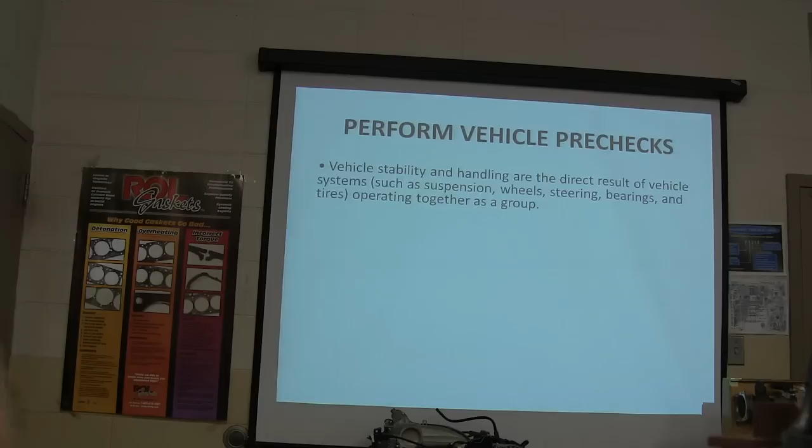Alignment procedures. The first thing you're supposed to do when getting ready to do an alignment is perform vehicle pre-checks, checking vehicle stability and handling for the result of vehicle systems such as suspension, wheels, steering, bearings, and tires. If you've got anything wrong with any of that stuff, you're wasting your time doing an alignment.

The other day we had one in here, the 08 Impala that came in pulling. Remember that? Who was working on that alignment? You and who else? Y'all worked on a four-wheel alignment. You got it all lined up just like it was supposed to, but it was still pulling in the same direction it was when it came in, even after all that trouble. What did we do then? We swapped the tires. The tires looked good, didn't they? But we swapped them and it pulled the other way, so we knew we had a tire pull. That's how you determine if you've got a tire pull. Then what did we do so we could give it back not pulling at all? Put him to the back. Was that Columbia's car? That was the dark blue one Crudup drives - the Impala that President Rydell used to drive.

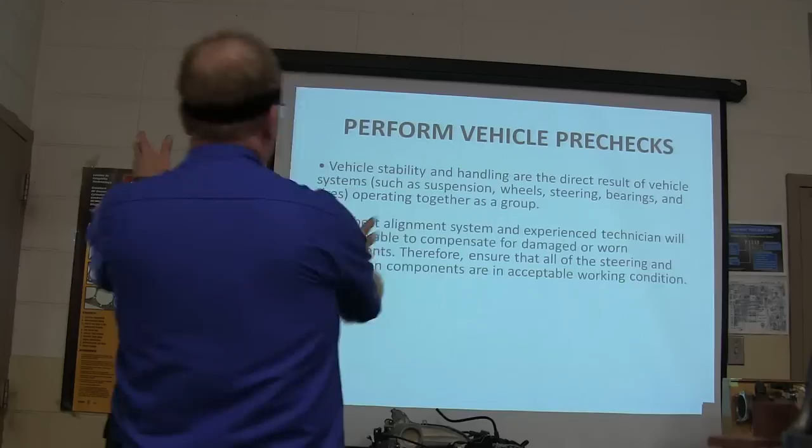So the best alignment system and experienced technician will never be able to compensate for damaged or worn components. You've got to ensure that all the steering and suspension components are in acceptable working condition.

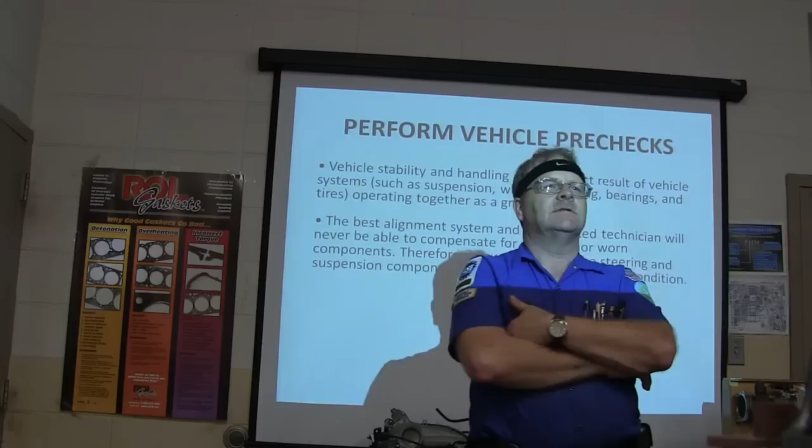How many of you, if I say the words dry park check, know what that is? Anybody? You have somebody get down with a flashlight and lay under that car where you can see the suspension and steering components, and have somebody turn the wheel a little bit back and forth - not all the way, just a little - and you look for what's loose under there. That's called a dry park check in some textbooks. I'll be honest, until I read some textbooks I never heard that term, but I've done that a lot - lay down under there and see what was loose, check the tie rods and everything, make sure that stuff is good.

It's really important, particularly if you're inspecting a 15-passenger van or something like that, to take your job seriously and get under there and look at those front end parts, and not just check it off. Because if there's 15 passengers and they go off in the canyon because a tie rod end came apart that you didn't catch, you may have had good cornbread and enjoyed your movie before bed, but they went off in the canyon because you were remiss in your duties. Be really, really careful. Take this very seriously.

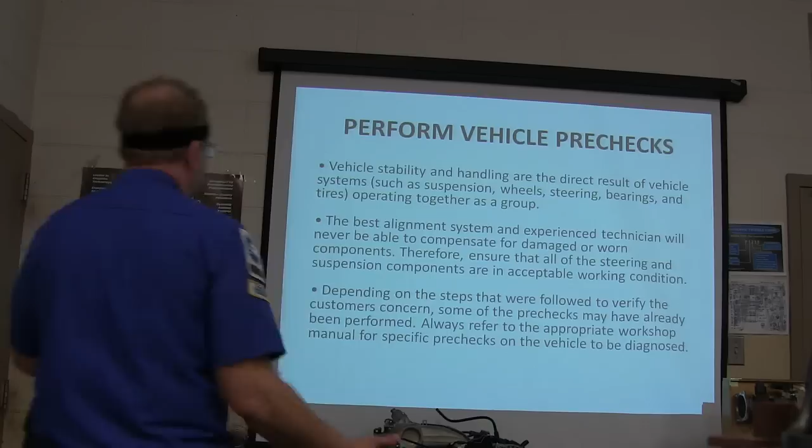Depending on the steps followed to verify the customer's concerns, some of the pre-checks may already have been performed, so always refer to the appropriate workshop manual for specific pre-checks on the vehicle in question.

Now we've got tires we're going to look at - these are on-the-ground pre-checks. We've got rapid shoulder wear. What causes that? That's underinflation, or riding on one side of the tire more than the other because of toe or camber. If you're wearing heavy on both sides, that's typically going to be under inflation, because the center of the tire dips in and the outer part wears more.

What about this one here, rapid center wear? That's overinflation. It's not a great illustration, but if you've got center wear worn out here, what happens is the tire bellies out when you put too much air in it, causing the center tread to wear out more. Now it doesn't dish like this - it's just a bad drawing. I could have fixed that in paint but didn't think about it. Cracked treads - that's old tires. Yeah, that's basically just something you look at.

How can you tell if a tire is too old? How old is too old for a tire? Because it's got a date of manufacture on it. So how old is too old though? 5 years. Well, it's actually 6 according to some of the people I've talked to.

Basically, if you look at a tire, say a lot of times we'll go get used tires, and we just look at the tread, or it looks pretty good, so we pop it on there. So what happens is if you don't look at the date on the tire - most of the time, about 90% of the time, you can look at the date and tell, because it's going to have 4004 or something like that. That's the 40th week of 2004, when it was made.

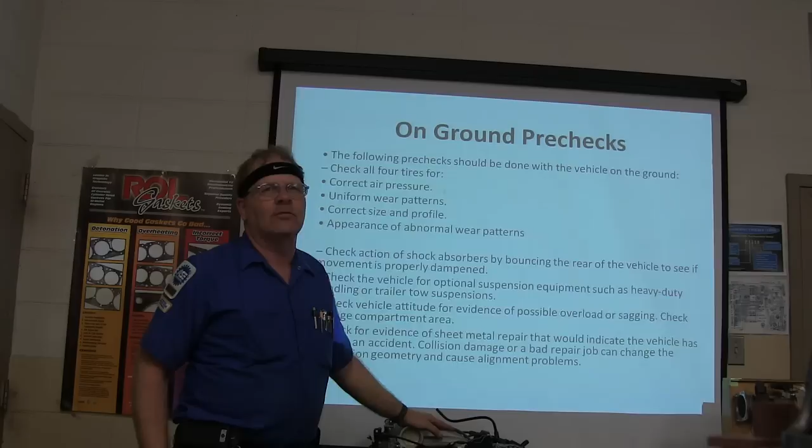Basically, if you see any of these conditions, you need to make sure you recognize them. So you're going to do this - another little check on the ground. Following pre-checks on the ground: all 4 tires for wear. If somebody's doing an alignment and they don't check the air pressure before they do the alignment, they are not doing it right. You better check that air pressure before you do anything else. Really important - the uniform wear patterns, which is what we just covered. Correct size and profile, appearance of abnormal wear pattern.

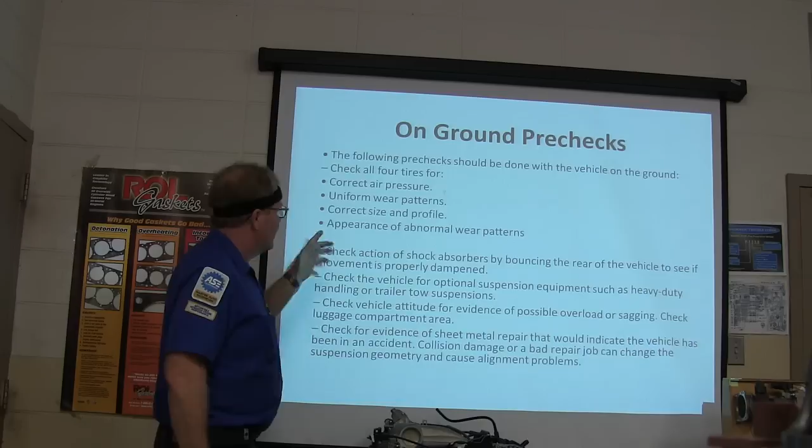You got to check the action of shock absorbers. Bounce the rear of the vehicle to see if movement's properly dampened. Have you ever seen one when somebody stops or something goes boing, boing, boing? We had an 05 Cadillac CTS pull in here one day - hit the brake and just bounce and bounce and bounce. Those shocks were about $100 a pop. The front one was shot. Didn't have any miles on it either.

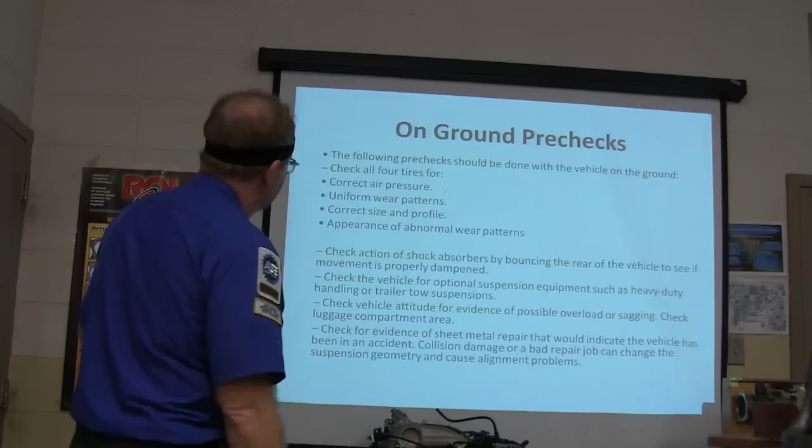Check the vehicle for optional suspension equipment, such as heavy duty handling or trailer tow suspensions. If somebody has beefed up the suspension, it's going to change the way it rides. Or the air ride - yep, that too.

Check vehicle attitude for evidence of possible overload or sagging. In other words, if you haven't looked in the trunk and they've got a bunch of copper wire back there or something weighing it down, you're going to get a skewed alignment. You may line it up while that hogwash is in the trunk, but what you're going to see is the alignment angle is going to change when you take stuff out of the trunk. Things change whenever that weight shifts.

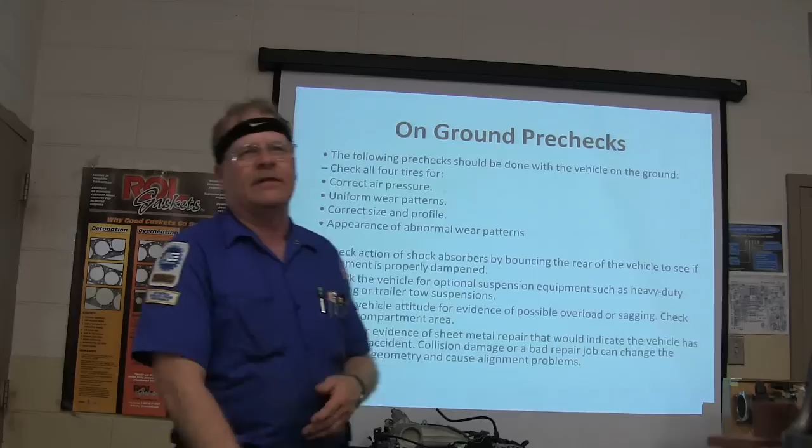Check for evidence of sheet metal repair that would indicate the vehicle's been in an accident - overspray, somebody put a fender on it. Has this thing been hit? Why is it in here for alignment to begin with? A really, really good body shop has all the specs for straightening the frame, and they'll have a nice frame straightener, and they'll use hydraulics and pull that thing back around like it's supposed to be. Wiregrass Body and Frame in Enterprise does really, really good work on that kind of thing, and they also guarantee all their paint for life, and I like to use them.

Okay, all right, put it on the lift. Disable the air suspension if it's equipped with it. We've talked about that before - you turn off the air suspension. When you lay it back, let it back down, it's going to squat down. You're going to wait till the compressor pumps it back up.

If the alignment rack has ramps, drive it onto the rack. That's what makes that big noise when you're driving on the rack. And if somebody's driving one onto the rack and it goes boom, boom, everybody looks over to see what that noise is, because it sounds like somebody hit something.

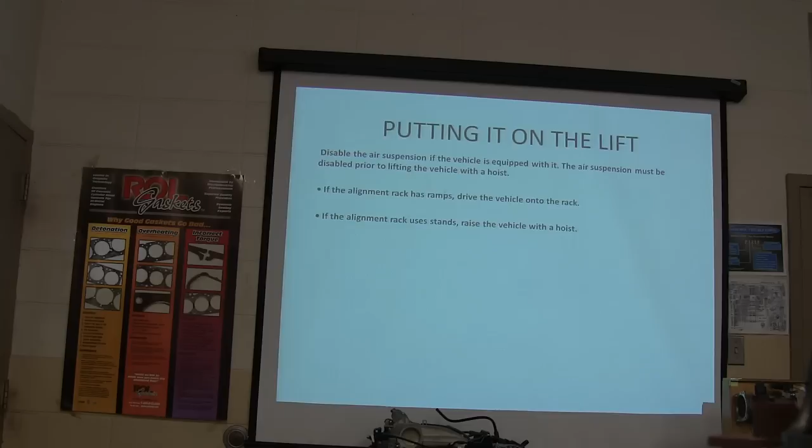If it uses stands, raise it with a hoist. But this one here, we drive up on ours. Center it on the alignment rack. Make sure that it's in the middle. It's something you probably ought to practice doing.

I'll tell you something else everybody needs to be able to do too. I actually had one guy come back over here and spend a day with me training himself to pull that little Escort with the manual transmission up on the alignment lift without driving it off the other end. He had actually learned to do that because he couldn't drive a stick. And furthermore, they were expecting him to pull one up on the alignment lift.

Who can drive a stick in here? I can. You can. Who can't? Depending on how touchy the clutch is, I can drive one. If the clutch is not too touchy, I can drive one.

How would you describe that to somebody, if you were going to explain with words how to drive a stick successfully? You gotta find the friction point. You gotta let the clutch out till you find that friction point. Once you find that, when you try it, you'll know.

Find that friction point and start giving it gas. Here's what I do: I like to set my heel on the floor, and I like to hinge it with the heel, because you got a lot more control that way than using a big old thigh muscle. Otherwise it's going to go boom, like that. But if you use the heel, as soon as you feel it start to grab, you freeze that foot, pick up a little speed, and then come on off of it.

I had to teach my daughter how to do that when she was 12. She was kind of clumsy with it for a little bit, but she got it. I taught the boys how to do it in a dune buggy we built. Man, they jumped terraces and everything else, but they could drive a stick when they were through, 10, 11 years old.

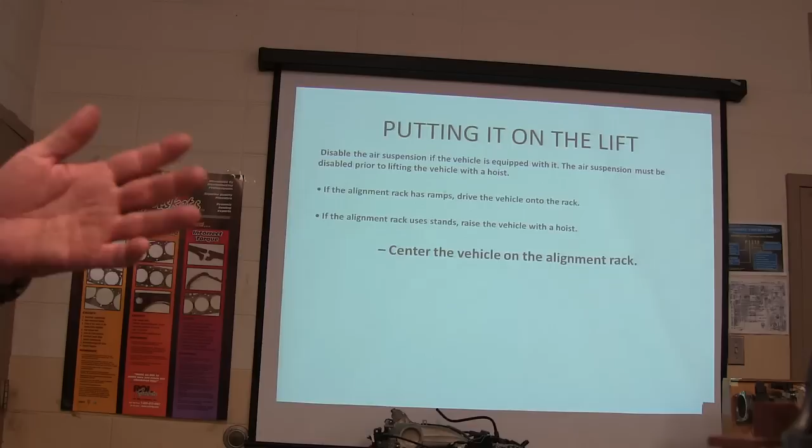It's really fun how fast kids can learn if they've never driven anything else and you teach them to drive a stick, and they've never even sat down in a car before. They can learn to drive a stick with blazing speed. But if you've got somebody that's been used to doing the automatic thing, then they have a horrible time because they just don't like that.

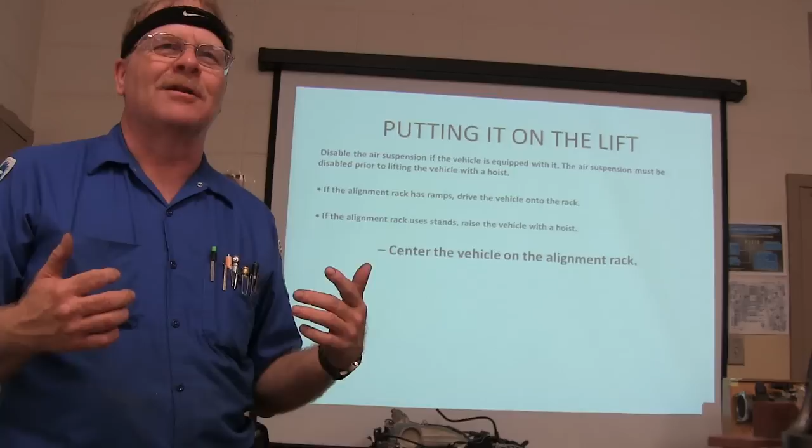But if you can't drive a stick and you're going to work as a mechanic, you may know everything else, but if you have to go tell somebody else to pull the car in for you, these other mechanics are laughing at you behind their hand. Richard, Garrett had to do that to me every day. Bless his heart, he said, you wouldn't expect him to be able to drive a stick, would you?

The vehicle must be centered in order to achieve the proper alignment readings. Make doggone sure you center the vehicle. I got off on a rabbit trail, and for that I apologize. Ensure that each wheel of the vehicle is directly over the center of the slip plate and turning angle gauges.

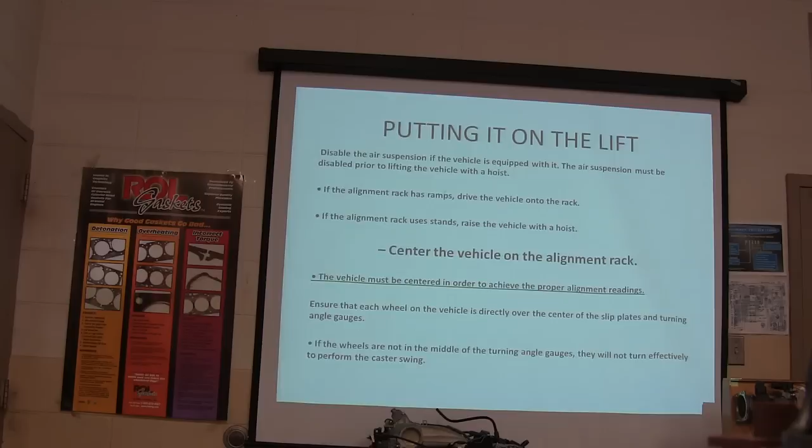What I like to do, like I'm always saying, and this is what the Hunter engineering guy will say: you don't drive it onto the slip plates, you stop it right before you get to them, put it in neutral, use your wheel chocks, roll it by hand onto the slip plates, and then pull your pins. If the wheels aren't in the middle of the turning angle gauges — those round things I was talking about — they won't turn effectively to perform the caster swing.

So you're going to raise it off the floor. Now this is another pre-check on the hoist. We haven't even hung our sensors yet. We're going to raise this thing off the floor, and this isn't something I've been having y'all do, but you're supposed to do it. Get it off the floor and grab it like this.

If you get it this way and that way, suspect wheel bearing issues because you've got them. Now, if you only get it this way but not that way, you're going to look at your tie rod ends and stuff.

Who had tie rod ends the other day? You did. He had inner and outer ones he had to do with Mom's car, and it drives really good now. So the steering wheel's crooked, right?

That's because we never even put it on the lift. We lined it up just like you were talking about, with a tape measure. We were in a hurry to get it out. If you can get somebody to sit there and hold the steering wheel while you're doing it, it'll stay straight. As long as the steering wheel's straight, you're okay, and if it's the same distance apart on the front end and rear of the tire, you're pretty close. But I always like to put it on the lift anyway.

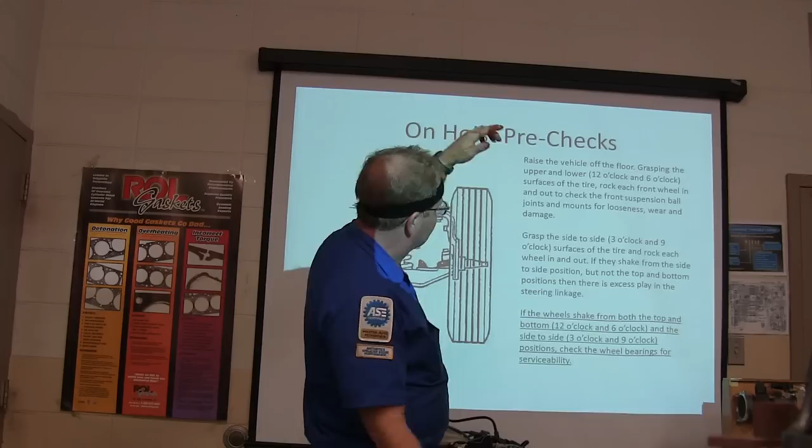12 o'clock and 6 o'clock, that's basically here and here, and you're going to do this right here. Grab to the side, 3 o'clock and 9 o'clock, and rock each wheel. If they shake side to side but not top and bottom, there's excess play in the steering linkage. If both shake, then you're going to look at the wheel bearings and see if they may need replacing. The worst vehicles for wearing this out are four-wheel drive trucks with big fat tires on them.

Check for loose suspension, steering nuts and bolts.

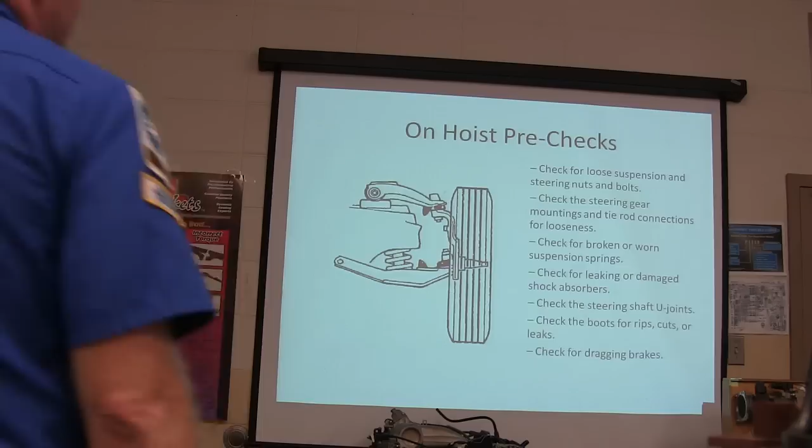There was a lady who came in here on a used Ford Fusion she bought from a GM dealer not far from here. She said she was hearing a noise whenever she turned. They told her, 'We don't work on Fords, get on out of here with your bad self.' So she came over here since she's a student, and asked if we'd look at it. I said sure.

We got up under there, and one of the suspension bolts was just about completely out. It had worked loose and was coming out, not quite all the way. If it had come out while she was driving, especially at highway speed, boom, hit a bump between here and Andalusia, and it would have been a disaster. They weren't even interested in looking under it, but it wasn't hard to see. You look under and the bolt is just naked, sticking out 3 or 4 inches. That's why it's important to check that.

This is what's terrible. If you miss something like that when you worked on it, if you threw an alignment on there and didn't take all these other checks seriously, and then something comes apart on them, even though you didn't loosen it, you didn't catch it either, and it's on you. You see what I mean?

Bad idea. Check the steering gear mountings and tie rod connections for looseness. When you turn it and see the rack moving because it's not anchored well, you've got issues. Check for broken or worn suspension springs, leaking or damaged shocks - that's part of our vehicle inspection test. Check steering and tie rod shaft U-joints and boots for rips, cuts, or leaks, and check for dragging brakes. Dragging brakes can make the car do crazy things, making it feel like an alignment problem.

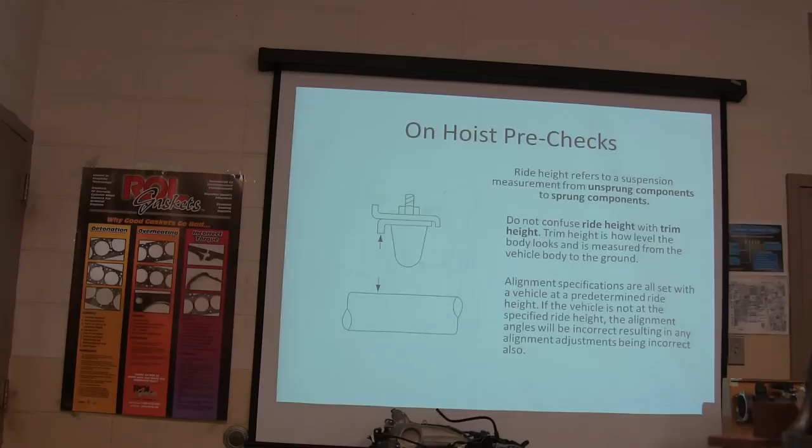Now, what's the difference between sprung and unsprung components? Can anybody tell me that? If I'm saying I want you to go out here on this vehicle that's on the lift and point out the components that are sprung and the ones that are unsprung. Who knows the difference between sprung and unsprung components? I've mentioned this once before in here.

If it's sitting on springs, it's sprung. If it's not sitting on springs, it's not. So give me something that's not sitting on springs. Everything that's below the spring, like your lower control arm, tires, all that stuff is unsprung. You got it?

But now watch this. Ride height refers to a suspension measurement from unsprung components to sprung components. That's not the same thing as trim height. You understand what I'm saying? Ride height and trim height. The trim height is how level the body looks, and it's measured. You've seen a car sitting crooked, unlevel - that's trim height. Ride height is basically something you're going to measure underneath.

You know that little machine over there? You ever seen that when you first pull up the car? It's giving you all these ride height measurements. If you're really a stickler and you want to really do front end stuff, you're not going to find a guy at a front end alignment rack that's measuring those things - we're going to find an unusual character. But that is something that we're supposed to basically know how to measure.

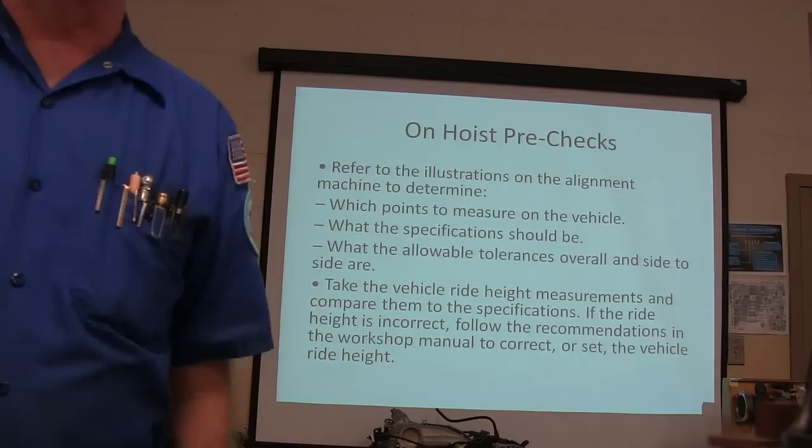Make sure the sensors are on the proper wheels. Don't drop the sensors, okay? Because if the sensors hit the floor, that's really expensive.

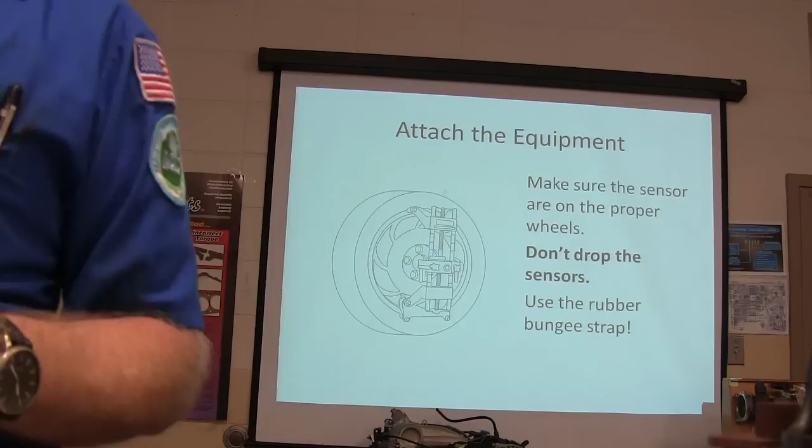I heard one hit the floor the other day, and what I heard was blam, and then I heard Melissa - she wasn't even on that side of the car, but I heard her say, ah, or something. You made some kind of a loud noise. And she had to go over to help Quincy pick the sensor up off the floor. It was a miracle it wasn't totally destroyed. And one of the things we don't want is this attitude that, well, it ain't mine, so I don't care if it falls on the floor or not. I just go home and eat my cornbread and watch a movie, let somebody else pay the bill. I just say not it. Yeah, not me, not me.

Use the rubber bungee strap to hold it on there. This one here came with rubber bungee straps.

You're going to perform the run-out compensation. You know how whenever you go 45 degrees back, you just roll it 45 degrees back, you level your sensors and push OK, and then you go 45 degrees forward. That's basically giving you everything you need to know about how much lateral run-out or whatever the wheel and hub, sensor located on the alignment head, has got. Failure to properly compensate will cause the alignment to mistakenly calculate the alignment angle. Now this is very small angle differences, but if somebody else hangs it and they compensate and they get different readings from what you did, that'll be the reason why.

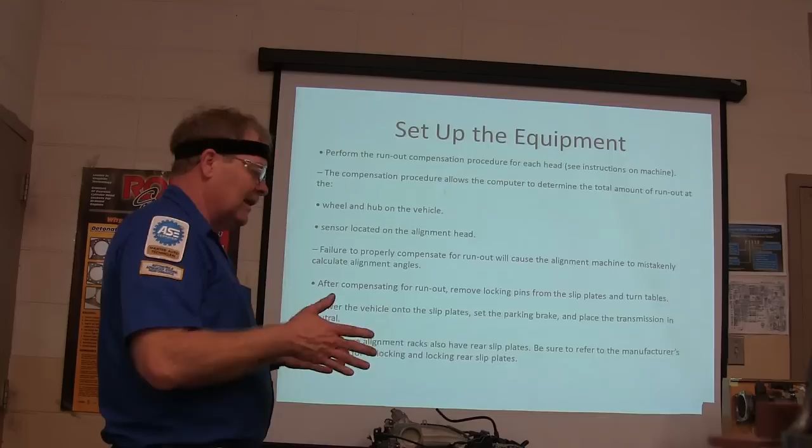Lower the vehicle onto the slip plates, set the parking brake, place the transmission in neutral. Some alignment racks have got rear slip plates, ours does. Pull them out. Why do you have slip plates to begin with? When you're adjusting the tires, you want them to move easily. You don't want the rubber dragging on the metal. It's just not good. You can't align something like that. You got to be able.

It's got to be able to move. Jounce the front and rear suspension. This is whenever you're getting ready. Did you know you're supposed to actually bounce it and let it find where it wants to be before you start? Sometimes you'll bounce it and the angles will change after you've already adjusted it because it was bound up a little bit. It's really interesting how that works.

Set it by jouncing the front and rear of the vehicle while it's sitting on the slip plates, and you put your lock mechanism on the brake pedal. You know what that looks like, right? That's that rod, it pushes the brake pedal and goes against the seat. It's an adjustable one. You want to ensure the wheels don't move while you're taking your steering axis inclination and the included angle measurements. Apply the brake pedal depressor inside the passenger compartment.

Now those SAI measurements are non-adjustable. The included angle and all that, you know.

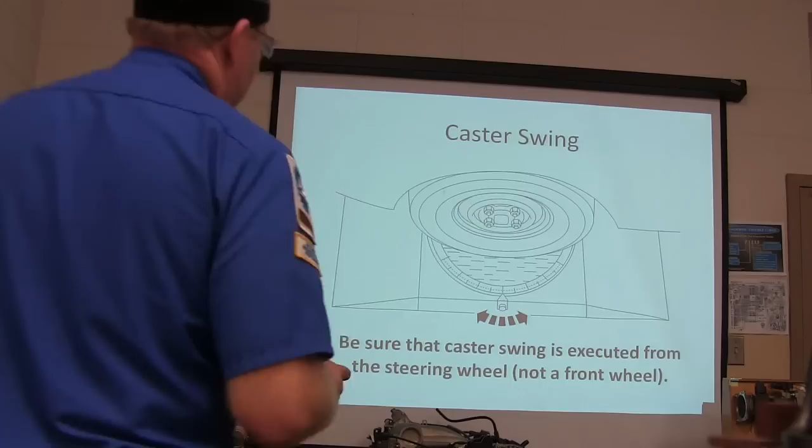Now right here you've got your caster swing. It needs to be executed from the steering wheel. I've seen about 646,000 front-end guys grab the wheels and turn them, basically stand on that thing and turn the steering wheel. You're going, how far do you go, how many degrees, who remembers? No, not that way, I'm talking about when you're turning the wheels doing your caster swing. 10, and back to the middle, right? Yep, that's enough to give you a caster swing.

Now this right here, if a measurement is within specifications, don't bother to adjust it. Basically the machine is going to give you the specifications. In the olden days you had to look them up, right?

The only time adjustments should be made is when the measurement's out of spec or the side-to-side difference is great enough to cause a pull or wear pattern. It's going to tell you in the middle about what the side-to-side difference is, right? That middle field between the toe and all, it'll have the left toe, the right toe, and then what the difference is between the two, and that's an important number too.

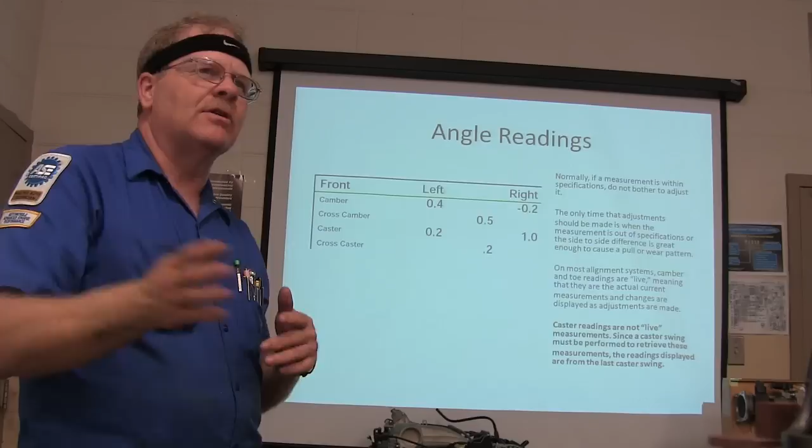On most alignment systems, camber and toe readings are live, meaning they're actual current measurements. You can actually adjust it while you watch the numbers change. You cannot adjust caster that way. You may think you're getting a reading and watching a reading change up there, but you've got to do another caster swing to get your next caster measurement so you'll know where you need to go. You understand that? Remember, caster is not a live one.

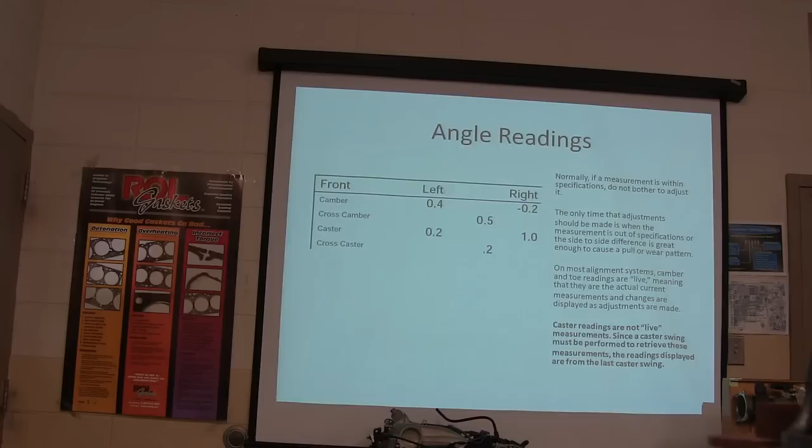Caster and camber should always be adjusted first and toe last. Does everybody understand that? Caster first if you're going to adjust caster, camber, and then toe. Because toe is not going to change those other ones, but those other ones will change toe. That makes sense?

Additionally, since the front alignment settings are referenced from the rear thrust line, all rear adjustments should be completed before adjusting the front. Even if you don't have rear adjustments, it's not a bad idea to look at the back ones, because you can actually click on the rear wheels and see what that looks like, right?

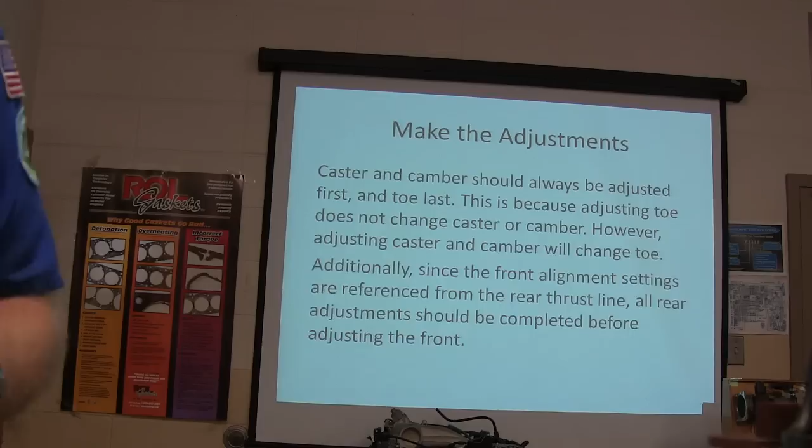You know the ones that I think are the coolest? Well, there's a couple of really cool ones. The Crown Victoria, right up there on the top, has got two different eccentrics, right next to each other, and you can set camber and caster right up there on top, real easy. I was trying to get somebody to do that the other day, and one of the ways I can tell that somebody didn't do the job they were supposed to do when completing the worksheet is if they ram it back to the road real quick and pull it off the lift before I get a chance to look at anything.

You know what I mean? You ever see anybody do that? I don't even come over here looking because they may be doing more work, so I'm just going to drop it off the lift real quick until I was done with it. Maybe I can get the sheet off my board even though I didn't learn anything. Is that good? That's not good, is it? Tell me that's not good. That's not good. Everybody knows that's not good.

All right, something else that'll happen is I'll go over here and see everybody pulling such and such a component apart, and I see it in their hand, and I know that they did it. Then I'll see somebody say, I pulled this, I'm through with this one. Well, I never saw the part in their hand, and it looks like they just rushed through it, only did part of it, and pulled it out. You know what I mean?

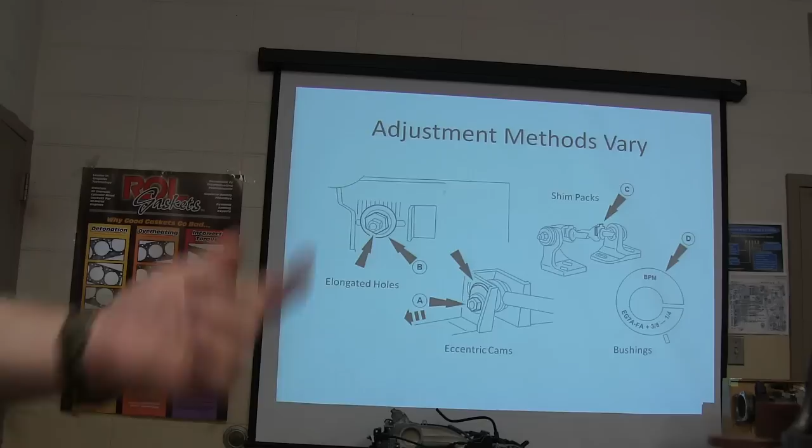Okay, so we got elongated holes, eccentric cams, shim packs, and bushings. That just about covers it as far as caster and camber. All right, there's your eccentric cam.

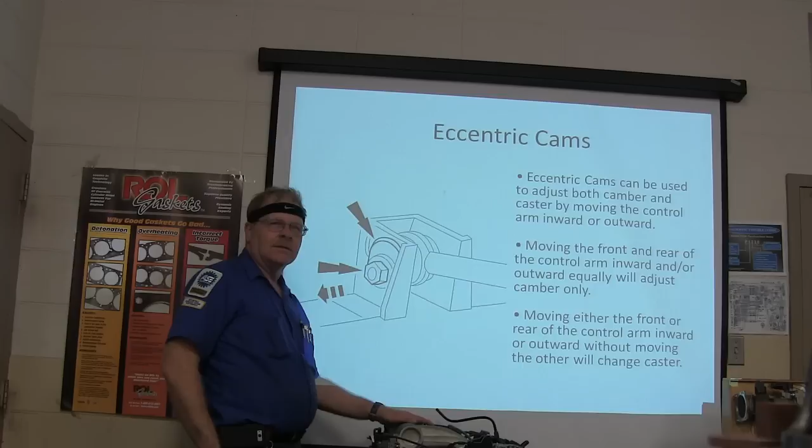Now what happens? Let me ask you this. What's going to happen if I loosen this up and I start turning this and I keep turning it? What happens then? Does it just keep on moving out? Does it ever stop moving out? It's egg-shaped. If you keep turning it, it's going to go back and forth. You can turn it far enough to where it starts going back the other direction, right? You get me?

I thought everybody could look at that and figure it out, but I had one guy that was asked that question by somebody really important. They said, what if I just kept turning this eccentric? He said, well, I guess it would just keep going in the same direction that you were turning it. It's going to just move on forever and ever? No, it's a doggone eccentric. It's going to go back and forth. Always remember that. Don't embarrass us here.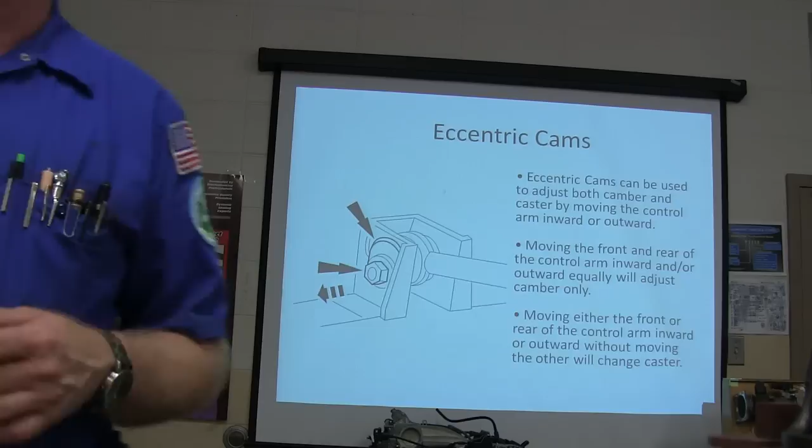Moving the front and rear of the control arm inward or outward equally adjusts the camber only, right? So basically you got a triangular thing here, and the ball joint's out here at the tip of my fingers. If I move it like this, I'm changing camber, because camber is the tilt of the wheel this way. If I move just one of them, notice how I'm moving that ball joint forward and back in relation to the lower ball joint. I'm basically changing caster by just moving one of them. So you set your caster first, get it right, and then for camber you got to move both exactly the same amount. You got it? And then you got toe, which is the other one you're going to set last.

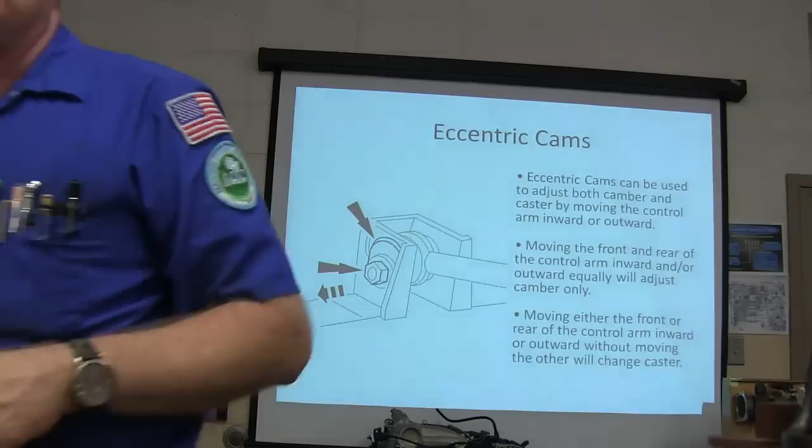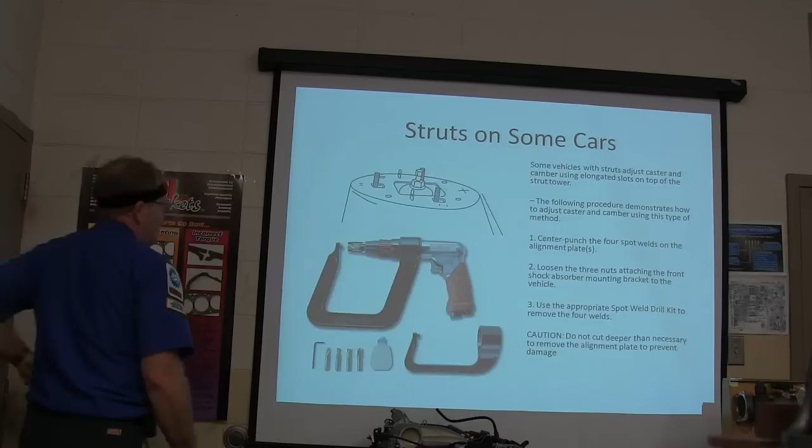All right, some of them with struts on top of the shock tower, you got to punch out some spot welds, and you got to elongate holes in order to set your camber and stuff. Those are a pain, unless somebody's already done it.

This is what a spot weld remover looks like. You've seen one of those before? That's just for drilling out spot welds. You can buy one of those online. They don't cost very much. All it's for is that.

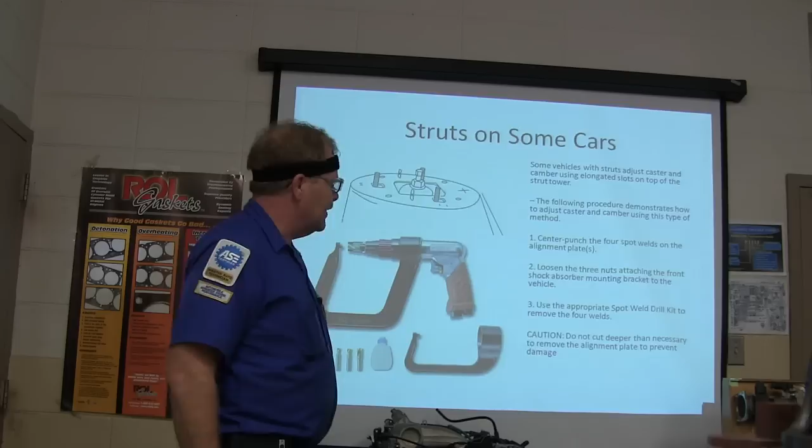Center punch the spot welds on the alignment plates, loosen the 3 nuts, use the appropriate spot weld drill kit to remove the 4 welds, and don't cut deeper than necessary because you don't want to cause damage. So basically that's a pretty cool tool there that I pulled up for you.

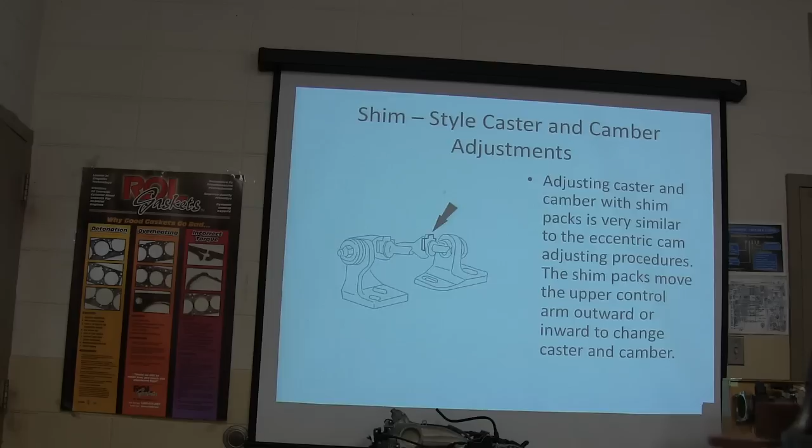Then you got shims. Some of the General Motors stuff, even up to 2000, like some of the little S10s and stuff, they got shims. The shims are the way things were done for years and years and years. If you're comfortable with that, it's just fine. If you'd rather have eccentrics, it's a pain and you feel like you're being punished dreadfully if you have shims. How many of you have seen one of these?

Probably sell these at a parts store. Eccentric bushings for the Fords that have I-beam suspension. That's what those are. You're going to take the bushing out that's in there because it's basically going to have a locator that won't let you turn it. You put one in there and it's got wrench flats on it, and you got various different degrees you can get to set your camber and caster with those.

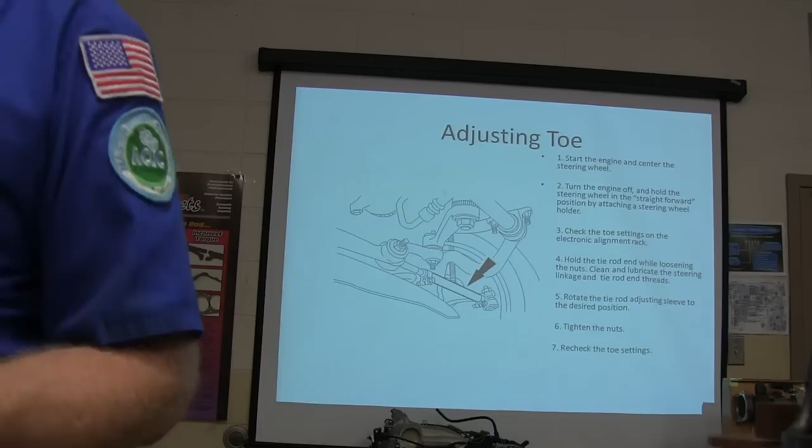And there's your toe adjustment. Everybody here, did you ever notice how in the machine over there, they never say anything about how you do a toe adjustment? They never say that because any bozo can figure out how to do a toe adjustment. If you see something like this on the back of the car, you'll set rear toe like that.

All right, now then, everybody know, tell me what the right answers to these questions are. They point the camera back at me, which is fine, I'm a lot better looking than that screen up there anyway. So, the only time a wheel alignment adjustment should be made is when? After all the pre-checks are complete. Come on. Whenever measurement is out of specifications or side-to-side difference is great enough to cause a pull or wear pattern. Can you write that down? Can you remember it? Will you get that right if I put it on a final exam? That's it. Don't turn it into a skeleton on me now.

Most caster and camber adjustments on late model vehicles are performed with what? No, that's the old ones. You said old, late model? No, late model is new. Late model is new. Late means yesterday. Early is like '64.

Got it? After adjusting caster, camber, and toe, what should be done to prevent damage to the slip plates? I'm preaching that all the time, guys. And every time I turn around, somebody's leaving without putting the pins back in the slip plates. The slip plates are just dancing around over there. Isn't that right? Who has left the pins out of the slip plates right here? Has anybody done that? Look at that. That girl is so honest. Everybody else is not me, not me, not me. You see that? All right.